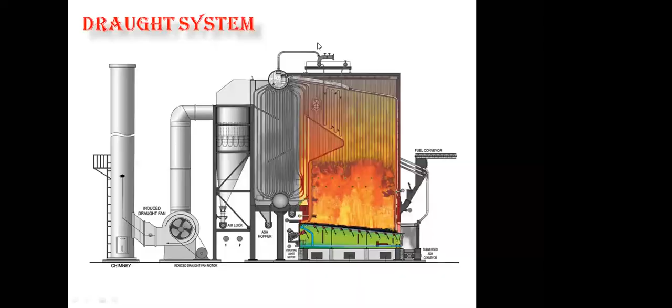Draft system - what is draft system? We need air to enter into the furnace, and the gases after combustion have to leave the combustion chamber to the boiler. The air should enter into the boiler and gases should leave the boiler. Therefore, gases should travel into the boiler and outside the boiler. They need a pressure difference to be there.

That is, there is a positive pressure. This is possible only if a pressure difference is maintained above and below the grate. The difference of pressure maintained is known as draught, or we can broadly call it the pressure difference between outside and inside the boiler. The pressure difference between outside and inside the boiler is called draft. The draft is defined as a small pressure difference which causes the flow of air and gases through the boiler.

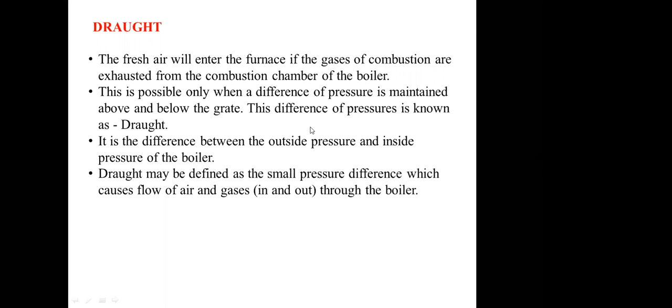The pressure difference వలన boiler లోకి air and gases in and out అవుతాయి, air లోపలికి వెళ్ళటానికి, తర్వాత combustion gases boiler లోంచి బయటకు రావడానికి useful అవుతుంది. Objectives of producing the draft:

To provide adequate supply of air for combustion of fuel. Therefore, we need a supply of air for combustion. If you want to combust the fuel, we need oxygen. Oxygen is supplied in the form of air. Therefore, we need adequate supply of air. By that, if the pressure difference is only there, only then it can be supplied.

Another thing is to clear the gases of combustion from the furnace. Once the combustion is completed,

Now after combustion, the gases have to leave the furnace - that is another objective, to clear the gases of combustion from the furnace. Next, to discharge the gases to the atmosphere through the chimney to avoid pollution. Therefore, the flue gases have to be discharged to atmosphere through chimney to avoid pollution. So there are 3 main objects: one is adequate supply of air for combustion of fuel, to clear the products of combustion from the furnace, and to discharge the gases to the atmosphere through the chimney to avoid pollution.

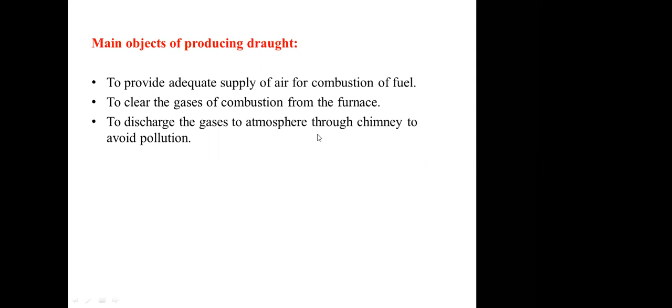That is called draught. If the draught is produced naturally, by producing a chimney, that is called natural draught system. If the pressure difference is created by using some artificial device, that is called artificial draught system.

Artificial draught systems are divided into 2 types. One is if I am using mechanical fans or blowers, we call it mechanical or fan draught system. If I am using a high velocity jet of steam, that is called steam jet draught system. In this steam jet draught system, there are 2 types: one is induced, another one is forced.

If I am forcing the steam to enter into the boiler, thereby creating a pressure difference, that is called forced draught. Induced means we can suck the air from the boiler by using a high velocity steam jet, that is called suction - that is induced draught system.

Now, if I am using a blower or fan to force the air into the boiler, that is called forced draught system. We can suck the air from the exhaust gases from the boiler, that is called induced draught. If I combine these 2, one fan forcing and another fan inducing, that is called balanced draught system.

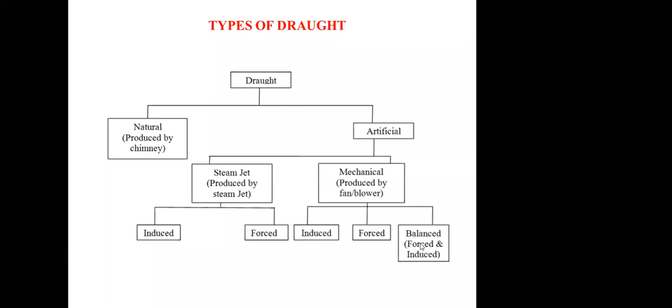The draft may be produced in different ways. In general, it may be classified into 2 types: natural or chimney draft, or artificial draft system.

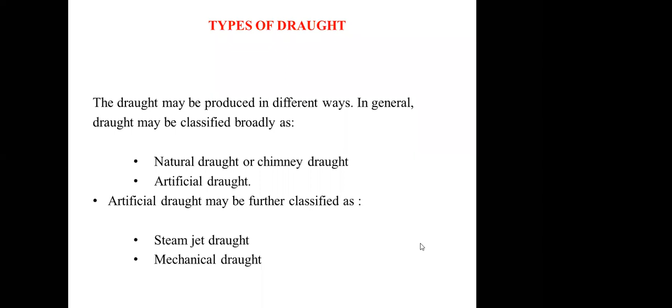Artificial draft system is further divided into two types: one is called steam jet draft, another is mechanical draft. Then there is natural draft system, where we use a chimney or a stack.

This is known as the chimney draft system. A chimney is a tall construction with masonry walls, brickwork, or concrete, or an iron tube of a certain length and height. The draft is created because of the pressure difference between the chimney and the boiler grate.

The pressure difference is caused because of the temperature and pressure inside and outside the chimney. Outside the chimney is atmospheric condition, while inside is high temperature flue gases. When temperature is more and pressure is more, density is less; when temperature is less, density is more. Because of this density difference, pressure difference is created.

This pressure difference produced because of density difference or height of the column is called the natural draft system. It is defined as the difference between the pressure of the column of hot gases in the chimney and the equivalent column of outside air.

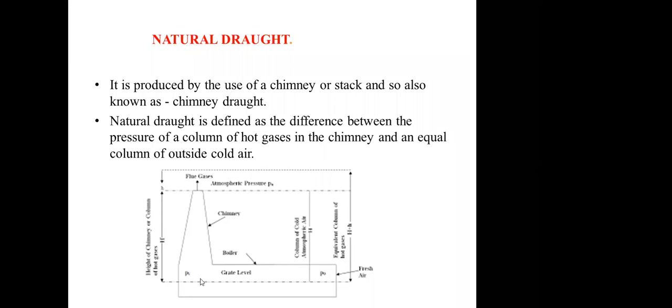But the drawback of this system is that we need a static draft for boiler installation varying between 25 to 350 mm of water column, depending on the size of the boiler. Naturally, it's not possible to build a chimney of enough height to produce a draft of large magnitude, and large height can create structural and stability problems.

Therefore, the natural draft system is used only for small capacity boilers. Another very important drawback is the climatic conditions.

Draft depends upon climatic conditions. When climatic conditions change, the height required will change, and this causes a problem.

Suppose in winter, the pressure and temperature are less.

Because the climatic condition changes, the height required will change. When the height required changes, the pressure difference will change. Therefore, draft is not uniform as climatic conditions change.

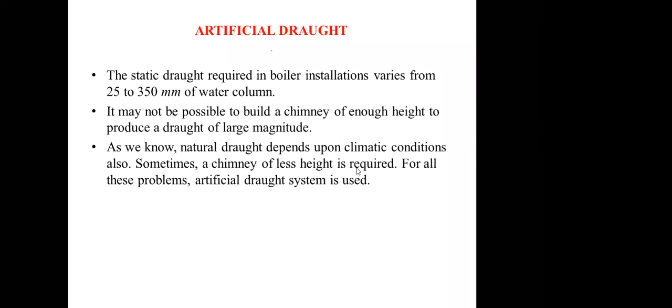This was overcome by using an artificial draft system. There are three types of mechanical draft systems: forced draft, induced draft, and balanced draft.

What is meant by forced draft? If I am creating a forced draft by using steam, we call it the forced draft steam jet system. If I am using forced air by using a fan or blower, that is called the forced draft mechanical system. That is the only difference between the mechanical and the steam jet system.

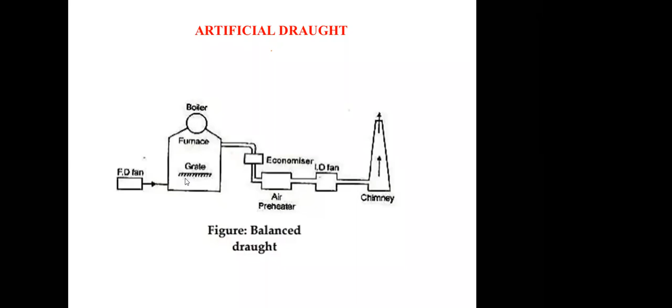Here we use a fan called ID fan - induced draft fan. It's provided at the outlet of the boiler, just before the chimney. This fan sucks the hot gases from the furnace through the superheater, economizer, reheater, and discharges the gases into the chimney. This results in furnace pressure lower than atmospheric pressure, affecting the flow of air from outside to the furnace.

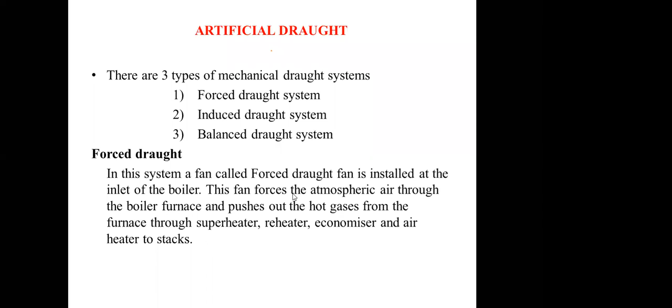Here, the pressure inside the boiler is higher than atmospheric pressure if using a forced draft system. Balanced draft system: we use both forced draft fan and induced draft fan. FD fan is used to draw a controlled quantity of air from the atmosphere and force it into the furnace.

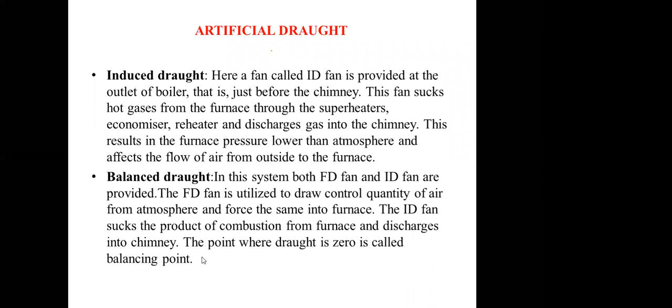The forced draft fan forces the air into the boiler, therefore pressure increases, and slowly pressure decreases to reach zero, which is balanced. Because of suction, pressure will be reduced, and when it goes to the chimney, pressure will be balanced - pressure will be zero at this point of the chimney. That is called the draft system.

Any doubts regarding the draft system?

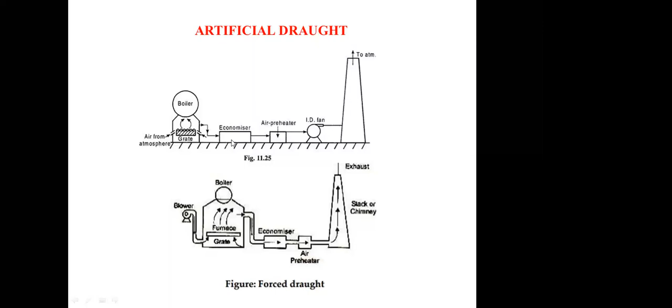Thereby, what happens is the air required for the boiler will be transferred and supplied through this from the atmosphere. Here it is sucked, the air will be sucked and transferred to the chimney.